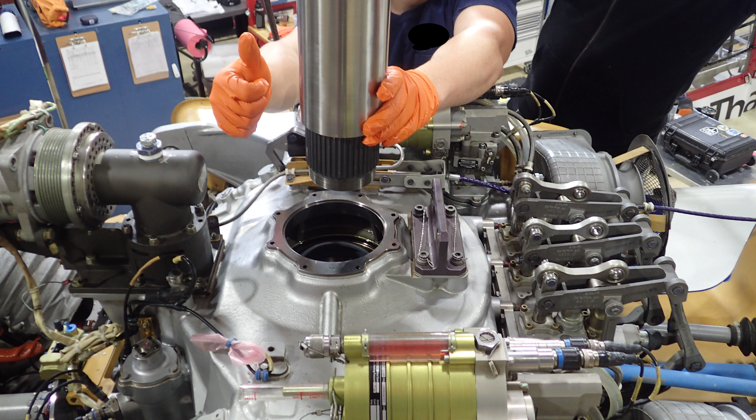This video we're going to go over installing the main rotor hub shaft, or the mast, into the transmission of an EC135 helicopter. The other two videos covered removing the mast and inspecting the spacer tube. This is the third and final video in this series.

I'm sorry, this is going to be a long video with a ton of detail. I'm going to talk a whole bunch, and it's going to be very boring, and you're going to be drinking from the fire hose. I'm sorry, but there's a lot of good information here. You're a lucky little boy, because you know why? You get to drink from the fire hose!

Okay, you ready? Yeah! Open wide! Aircraft Maintenance Manual, AMM.

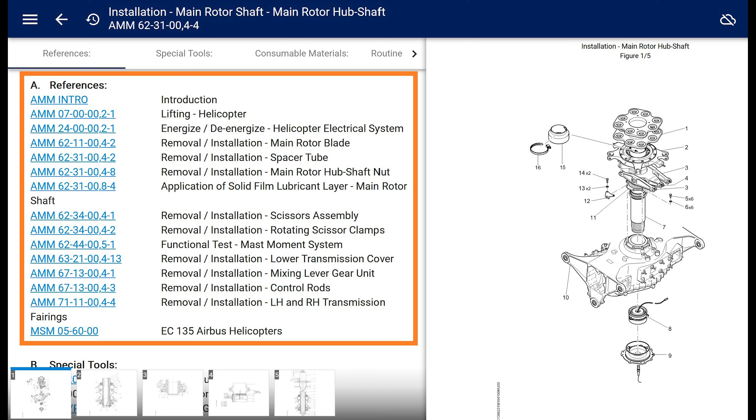623100 4-4. There are a lot of references. See all these references here? And when you go to those references, the other chapters in the maintenance manual will send you somewhere else as well. So if you go to this section, the one for installing the main rotor hub shaft, the mast, it doesn't tell you to add oil. That's in a different section, installing the lower cover to the transmission. Anyway, we're going to go over all these things.

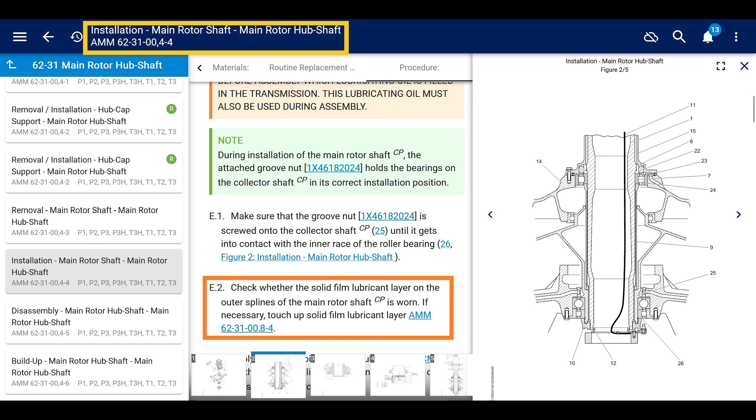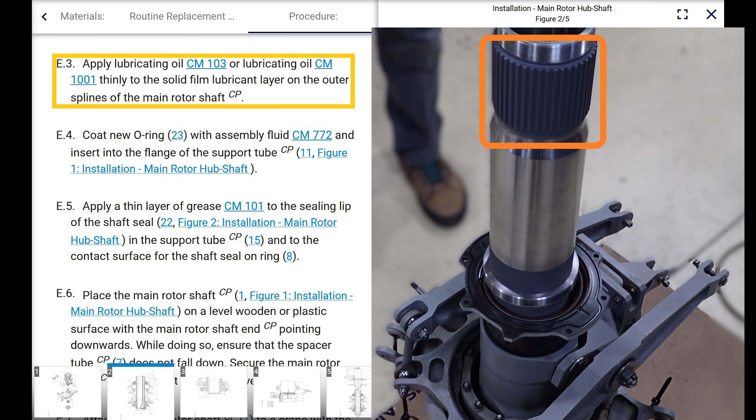Next, check whether the solid film lubricant layer on the outer splines of the mast is worn. If necessary, touch up the solid film layer. Next, figure out what kind of oil you have in your transmission and put some oil on the splines of the mast. Next, coat a new O-ring with assembly fluid, CM772, which is UltraChem assembly fluid number one.

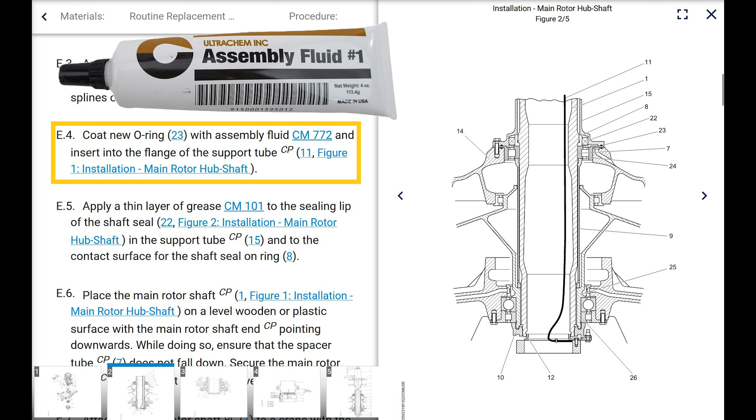You have to have this. If you don't, that O-ring is not going to stay in there. This stuff is super sticky, and it keeps the O-ring in that groove. Since that groove isn't a big circle, it's a weird shape, it keeps it in there way better than anything else I've tried to use.

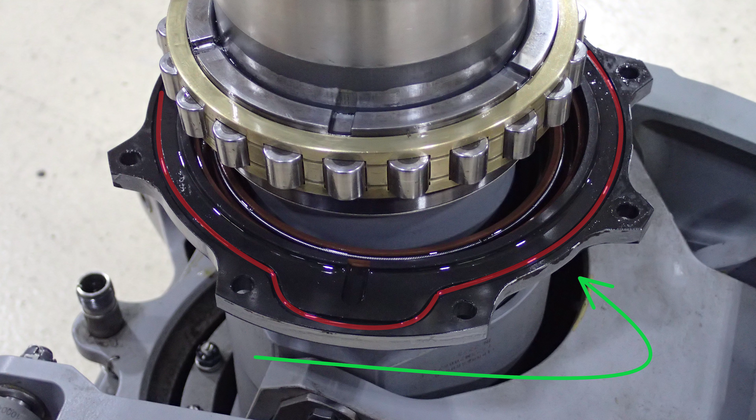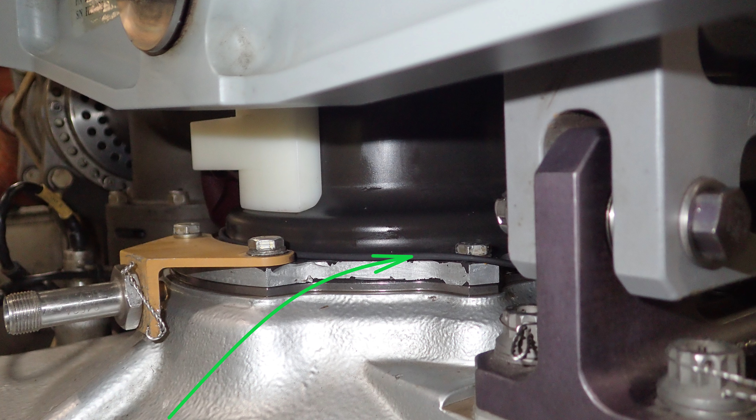While you're doing this, grab another O-ring, the same O-ring, and put it around the mast and put it on the other side of the support tube, the swash plate support tube. So when you're all done and you put this thing all together, if that O-ring leaks or got pinched somehow, you'll have an extra O-ring. All you have to do is lift up the support tube, put the new O-ring in there, and remove the old one.

Apply a thin layer of grease, CM101, to the sealing lip of the shaft seal in the support tube and to the contact surface for the shaft seal on the ring. So put grease on the lip of the seal and on this ring.

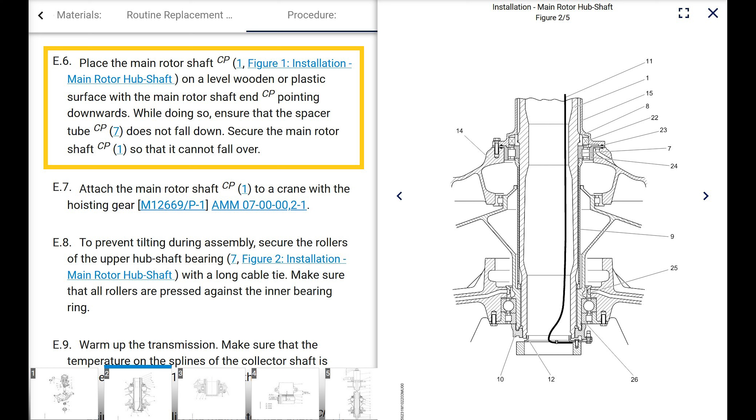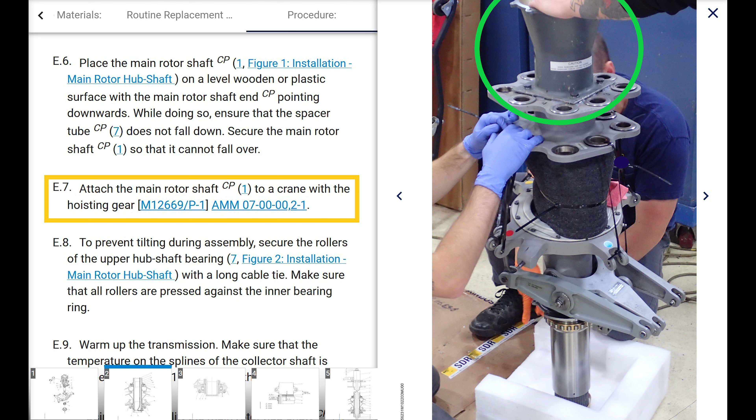All right, get a couple people, put some gloves on, pick up the mast and stand it right side up, making sure it doesn't fall down and that it's sitting on something nice and soft. Then put the flower pot back on and hook up the lifting eye and the crane or hoist, however you're going to lift this thing up.

Put a big zip tie around the rollers of the mast bearing and make sure you push all those rollers in and cover it with oil. It doesn't tell you to do that, but there's nothing wrong with putting oil on it. Make sure those rollers are pushed in, none of them stuck out at all.

If they're stuck out at all, when you drop this into the top of the transmission, it will catch on the outer race of the bearing and wreck the brass. It will wreck the brass carrier there.

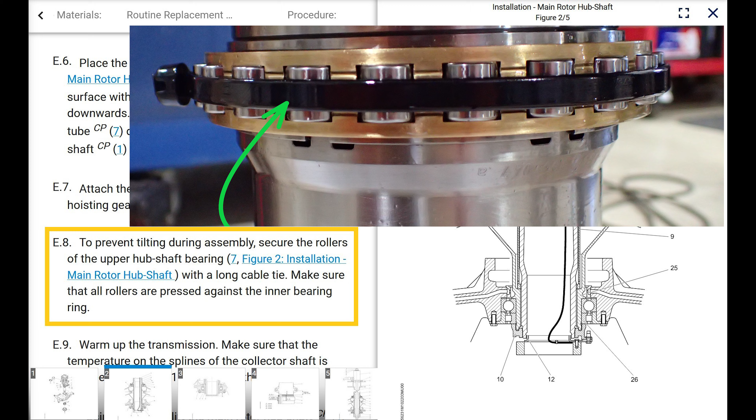I've heard of a guy having one of those rollers explode on him. So be careful, wear safety glasses when you're doing this.

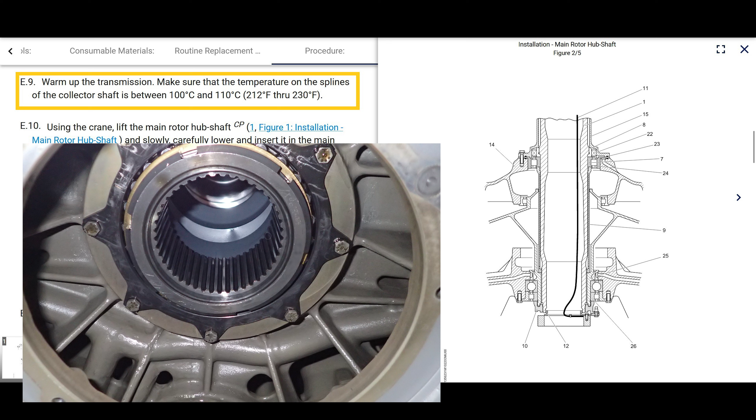Next, you want to warm up the transmission pretty hot. Make sure the temperature of the splines of the collector shaft is between 100 and 110 degrees Celsius. That's pretty hot, so set up a heat gun blowing heat into the bottom of the transmission, and put a piece of sheet metal over the top so the heat doesn't escape. Leave it there until the outside of the transmission is pretty hot. If it's hot enough, the mast just drops in.

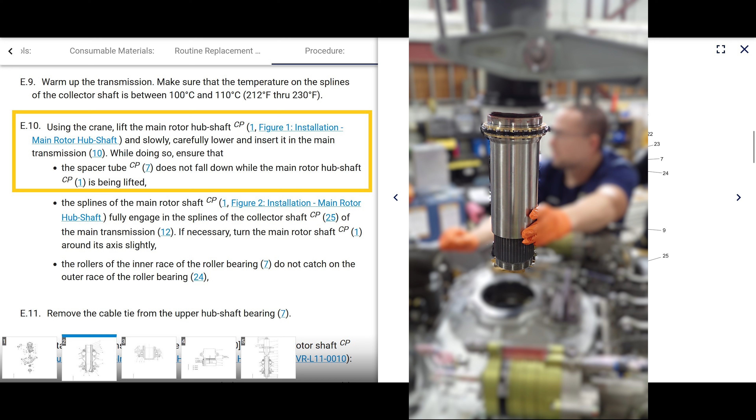Next, using a crane, lift the mast and slowly lower it into the top of the transmission. While doing so, ensure that the spacer tube does not fall down, and that the splines of the main rotor shaft fully engage the splines of the collector shaft in the transmission.

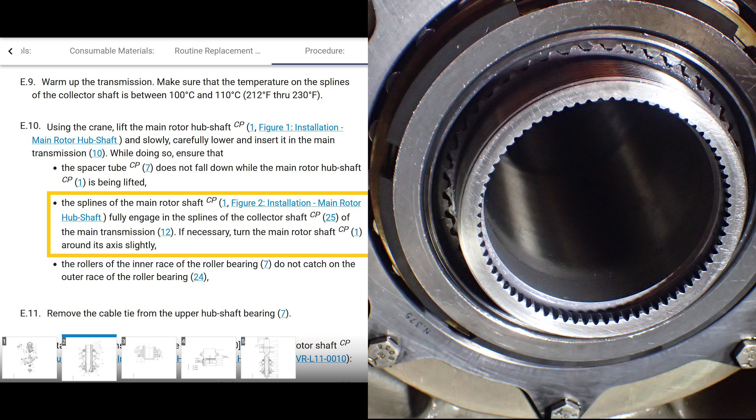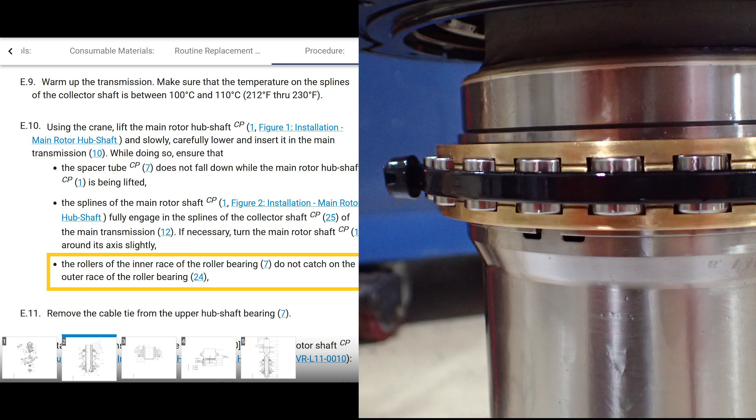If you need to, you can rotate the mast—grab the upper part of the mast flange and rotate it a little until the splines line up, and then it just drops in. Just make sure the rollers on that bearing don't catch on the outer race.

When it's sliding down into the transmission, the tolerance is really close, so the zip tie will get pushed up and out—it won't get jammed in there. Just make sure you cut that zip tie and pull it out when you're done. That's in the manual too.

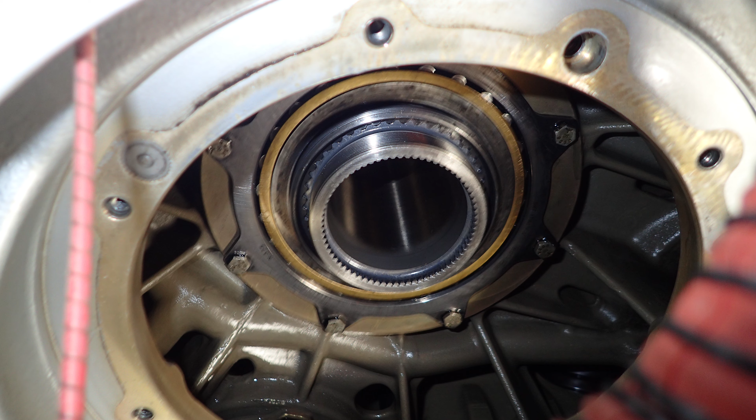We're going to deviate from the manual just a little bit, but we'll go through it. At this point, if you check dimension X and it's what it was when you removed it, or within the tolerances stated, we'll go through that later. I don't see why you'd have to do this next step.

But this next step is Airbus wants you to squeeze this whole thing together using a thing called the pre-tensioning device, which squeezes the mast into the collector shaft of the transmission with a lot of force. The pre-tensioning device parts are marked in orange, and the parts marked in green are in your kit, except maybe one of those.

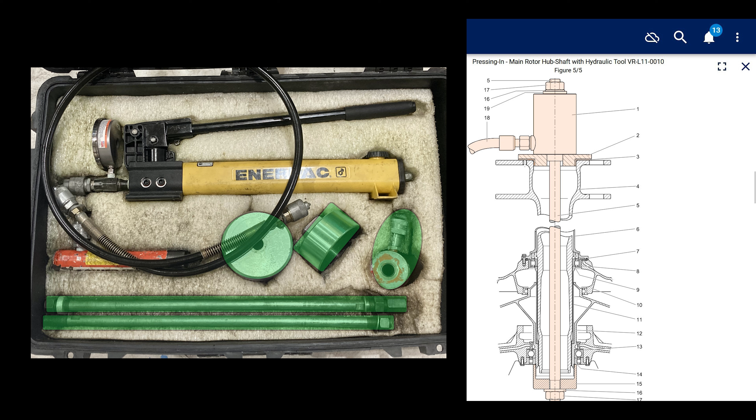Anyway, you have to put it all together from the top down. Before you hook up the stuff on the bottom, remove the groove nut, the one you just put on. The reason it was there, according to Airbus, is so the inner race of your collector shaft bearing doesn't fall out while you're putting the mast in. I've never seen that happen, but like I said previously, don't be the guy who has to call your boss and say you broke the transmission because you didn't use the correct tool.

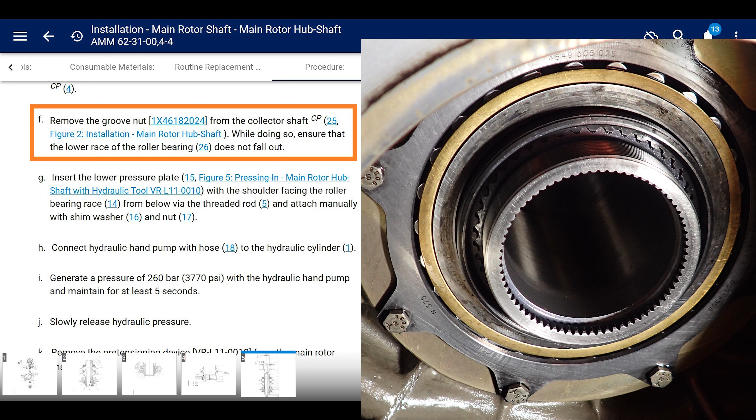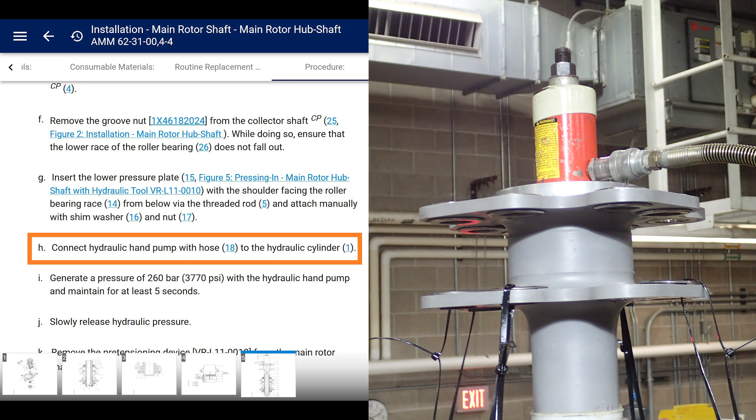At this point, remove the groove nut. You need to look at the drawing and make sure everything's hooked up correctly—it's not super confusing, just make sure you have all the right parts pushing on the right parts inside the transmission. Connect the hydraulic hand pump with the hose to the hydraulic cylinder. Generate a pressure of 3,770 psi with the hydraulic hand pump and maintain it for at least 5 seconds.

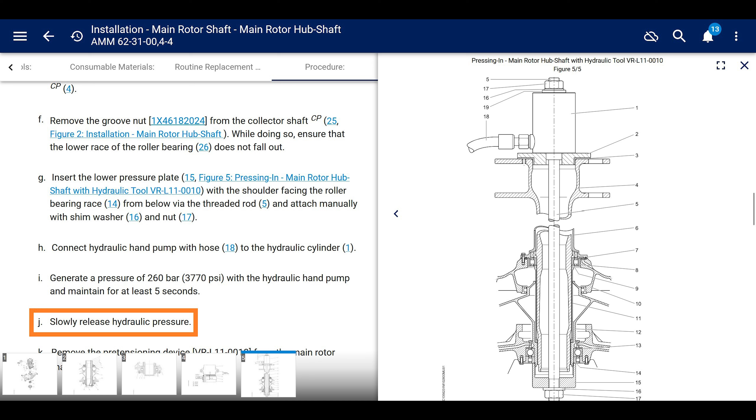It's a decent amount of pressure. Slowly release the hydraulic pressure, then remove the pre-tensioning bolt from the main rotor hub shaft pre-tensioning device.

Now they want you to check dimension X again, like we talked about before—that's from the lower edge of the mast, or the main rotor hub shaft, to the lower edge of the collector shaft. When checking dimension X, if you're using the same mast and the same spacer tube, and reinstalling the same ones, compare the dimension to what you had before you removed it—it should be equal or greater. If not, something's not installed correctly, like maybe that ring didn't get pushed all the way down during reinstallation of the mast.

If not the same mast and the same spacer tube are to be reinstalled, the clearance of dimension X should be between 13.9 millimeters and 14.9 millimeters. If it's not in this range, then something's wrong.

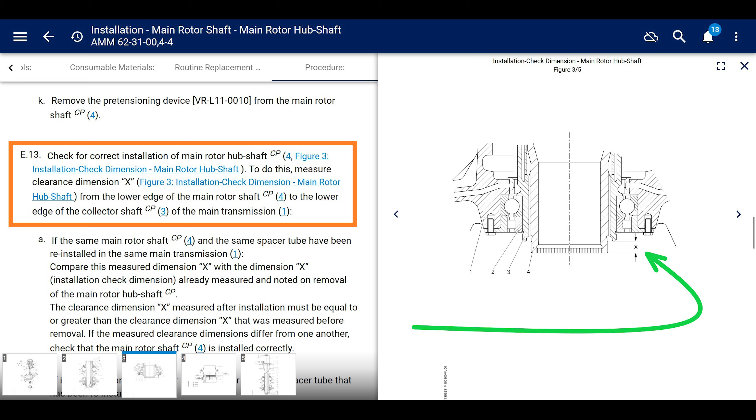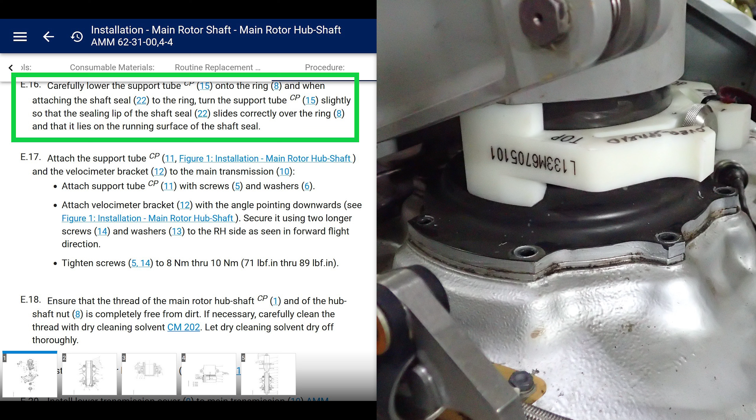Also check to see if the spiral spring is in the groove of the seal. If that pops out, your seal is not going to seal. Look with a mirror, double check that spring is where it's supposed to be inside of that seal. Carefully lower the support tube onto the ring which is on the mast, so the shaft seal has to go around that ring. You could twist it around a little bit so that the lip of the seal goes around that ring. Remember, that should have been coated with grease, so it should slide down pretty easily.

Next, it says attach the support tube and the velocimeter bracket to the transmission, and just make sure that the velocimeter bracket, the part with the angle, points down. If it points up, it could interfere with your flight controls, so it's kind of a big deal.

Moving along, ensure that the threads on the very bottom of the mast are clean and free of dirt. It specifically says that. Hopefully you would have cleaned it before you dropped it in there, and put oil on it. It doesn't ever tell you to put oil on it, but you should, because you got to put oil on the mast nut. Anyway, make sure it's clean. If you need to, clean it with CM202 dry cleaning solvent and let it dry. Next thing we're going to do is install the mast nut, the main rotor hub shaft nut.

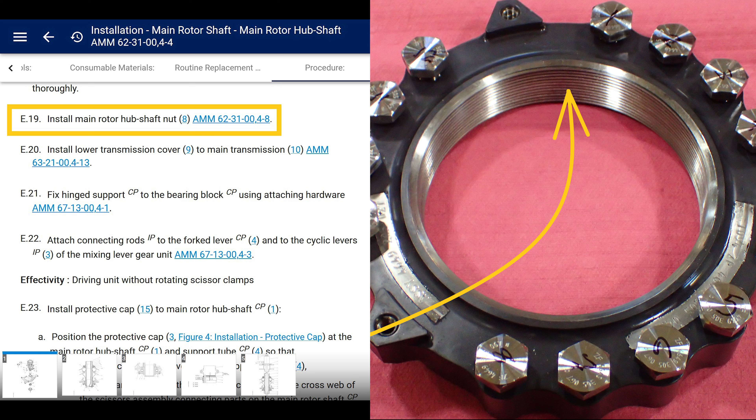That's a different chapter, and we're going to go into that with a lot of detail. This is AMM 62-31-00,4-8, mast nut install.

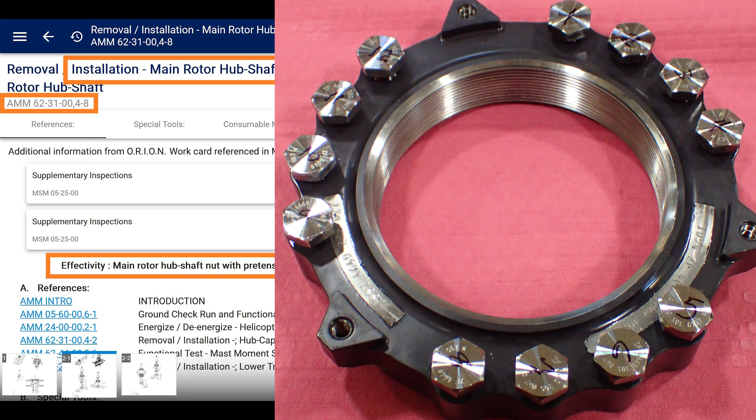There's two different types of mast nuts. The type we have here is the mast nut with the pre-tensioning bolts, that's the newest style mast nut. There's also the lower seal, open retaining ring, closed retaining ring, with the seal, without the seal. There's like 6 different versions. Anyway, we're going to go step by step with what we have.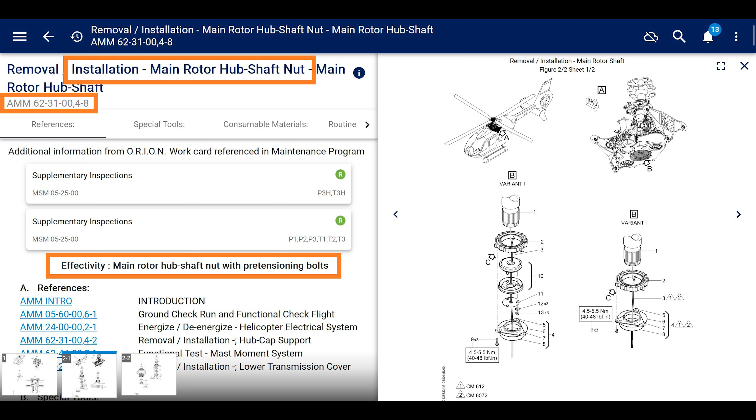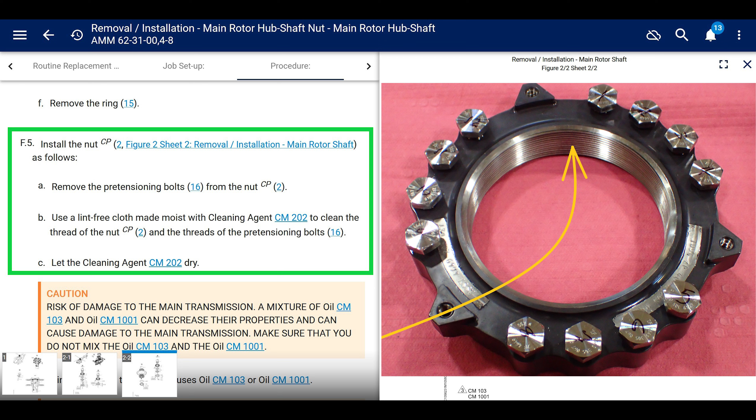This is the new style mast nut with the pre-tensioning bolts. It says remove the pre-tensioning bolts from the nut. Clean the threads of the nut and the threads of the pre-tensioning bolts with CM202 and let it dry. Then figure out what kind of oil you have in your transmission, hopefully you know because you can't mix them. They want you to apply transmission oil onto the threads of the nut and the threads of the pre-tensioning bolts.

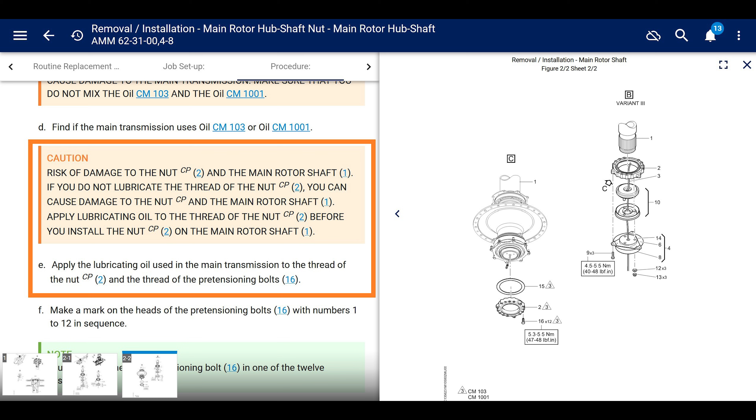Then install the pre-tensioning bolts, but just thread them down, don't thread them through the nut. Thread them like 90% of the way through, don't let them protrude out the other side. Then clean the top, the heads of those bolts, and mark them 1 through 12 in a circle clockwise.

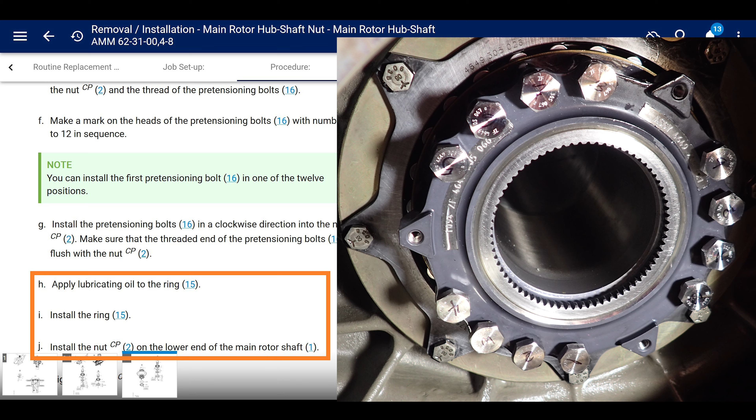Then they want you to apply oil, transmission oil, to the ring. They want you to install the ring and install the nut onto the bottom of the mast. Then tighten the nut. So that big thing with the pre-tensioning bolts, just thread that on, don't get crazy, just thread it until it makes contact and it's somewhat tight. But when you go torque these, they're going to allow you to loosen it up a little bit if you need to line up everything, the retaining ring.

If we scroll down, effectivity, closed retaining ring, post-service bulletin EC135 63016 on this part of the maintenance manual. This is variant 3, closed retaining ring, and the service bulletin is the seal that goes onto the retaining ring, so the retaining ring is an assembly. We went over this in the previous video. It's got the retaining ring, the bolt locking washer, and the rotor ring for the mast moment indication, and it also has this lower seal bolted to it.

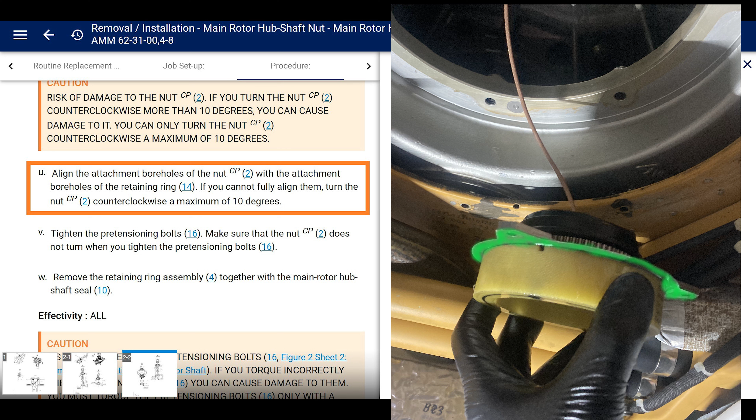It says install the retaining ring assembly. Okay, look, we're going to install this just to make sure it lines up. Then we're going to take it off, and then we're going to torque these bolts. So no worries. You've got the mast nut threaded on. Put the retaining ring up there.

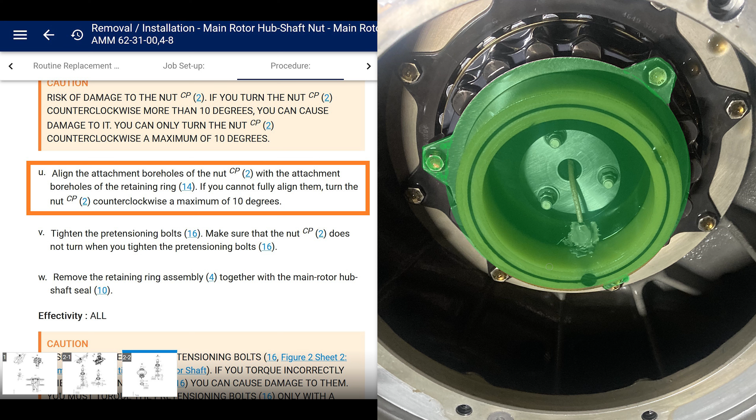You're going to need to drop a string down the mast and pull up the cable for the mast moment wire, then put the retaining ring assembly up there and try to line it up with the splines of the mast and pick up the 3 holes that line up with the mast that this bolts to. If it doesn't fit, you could pop it out and turn it 120 degrees. You have 3 tries to line it up — figure out which one is closest.

It says there's a huge caution, okay? You're allowed to back up the mast nut 10 degrees. If you go more than 10 degrees, you're going to damage stuff. And considering this is probably the most critical part on the helicopter, follow that rule. I've seen it line up most of the time without loosening it up, which is pretty cool.

Anyway, put the retaining ring assembly up in there. Align the attachment bore holes of the nut with the attachment bore holes of the retaining ring. If you cannot fully align them, turn the nut counterclockwise — that means loosening the nut a maximum of 10 degrees. I would put the 3 bolts in that attach it, just thread them in by hand, just to make sure they're lined up, because it will look lined up but it won't be. Later on, you'll be pissed off because you have to do all this again.

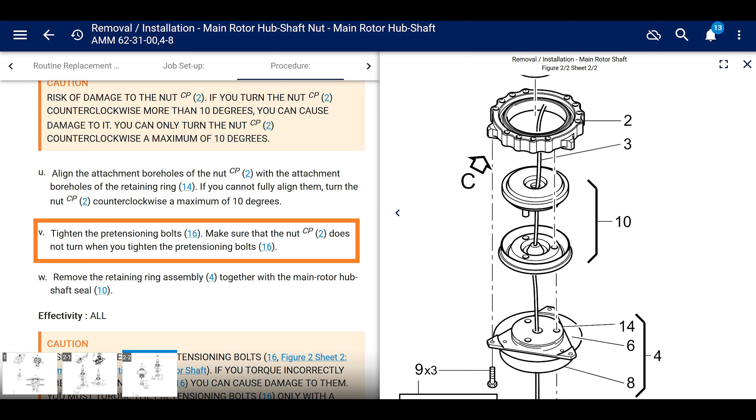Anyway, while that's in there, reach over the retaining ring and use your fingers to tighten the pre-tensioning bolts, those 12 bolts, just so the nut doesn't move when you take the retaining ring assembly back off, so that you could torque these bolts — if that makes sense. I know this is a lot of words and I'm blah, blah, blahing you, but hopefully it's a little bit clearer. The pre-tensioning bolts are snugged up with your fingers.

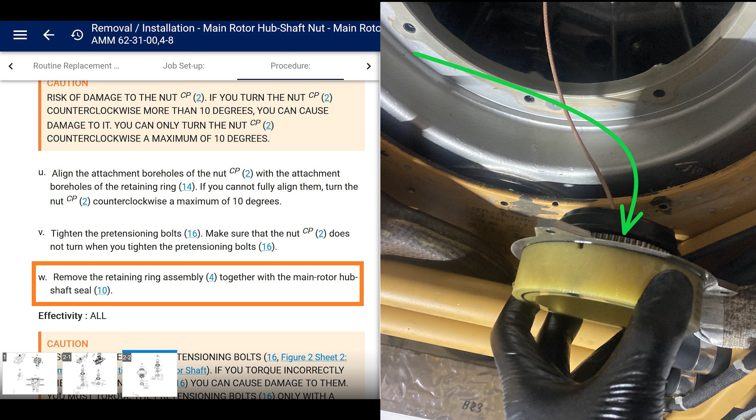Now you could remove the retaining ring assembly, remove it with the mast seal at the same time, because it's a big assembly. This is effectivity of all, and this is how you torque the pre-tensioning bolts of the mast nut. Torquing the pre-tensioning bolts has a specific sequence, and it's like 2 pages in the maintenance manual. You have to follow it correctly.

If you just look at the figure and you see the torque is 47 to 48 inch-pounds, and you're like, oh, I'm just going to torque this to 48 inch-pounds, you're going to screw stuff up. That would be very bad. That's super incorrect. And like I said, this is probably the most critical part on the helicopter, so it has to be done correctly.

We're going to go over that now. It's not a big deal, but we're just going to make sure we state the proper process on how to torque this mast nut. It's June 2024 — it could be revised tomorrow. Read the manual, don't rely on the video. This is just a refresher for reference.

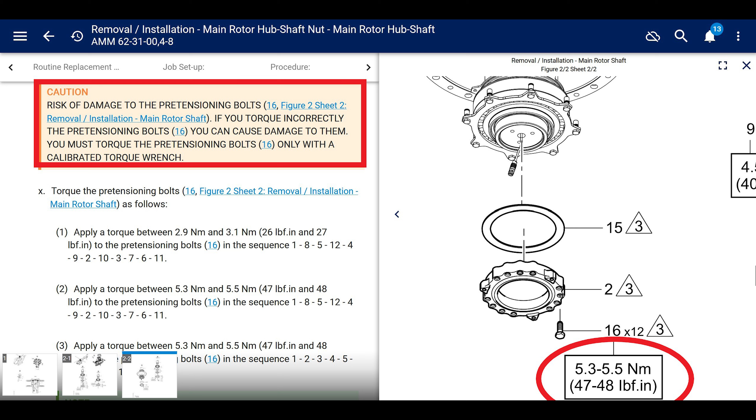Next, it says torque tighten the pre-tensioning bolts in the sequence 1, 8, 5, 12, 4, 9, 2, 10, 3, 7, 6, 11. After that, once you've torqued it to 27, you change your torque wrench to 48 inch-pounds, between 47 and 48 inch-pounds, and you torque it in the same sequence: 1, 8, 5, 12, 4, 9, 2, 10, 3, 7, 6, 11.

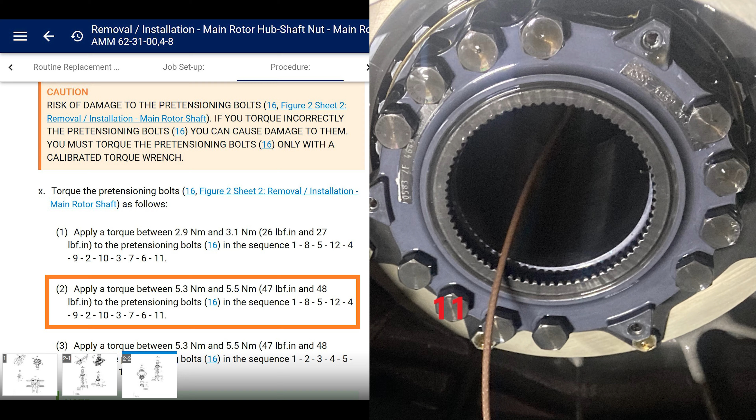Third step, same torque, 48 inch-pounds, and you torque it 1 through 12: 1, 2, 3, 4, 5, 6, 7, 8, 9, 10, 11, 12. Oh, you can count — good for you.

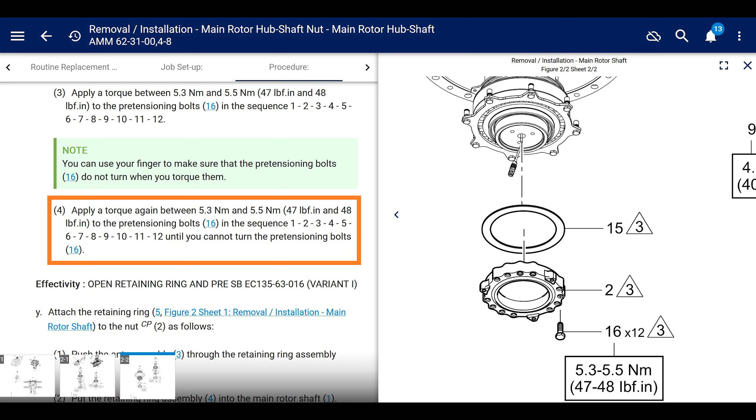Next, step 4 — well, number 4 is repeating forever until it doesn't spin, all right? Apply the torque again at 48 inch-pounds in the sequence 1 through 12 until you cannot turn the bolts, okay? Because you'll have one that'll turn, one that'll just move a little tiny bit each time you go around, so you end up going around like 4, 5, 6 times originally.

On the retorque, I think I went around three or four times just to make sure it was torqued. But there's a note here—it says you can use your finger to make sure the bolts do not turn when you torque them. Okay, thanks for that. And here's the effectivity closed retaining ring.

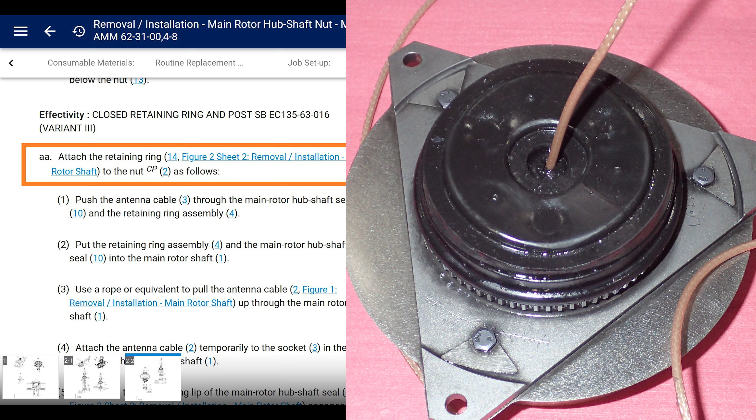What do we do next? Put the retaining ring assembly and the main rotor hub shaft seal, since they're together, into the mast, the main rotor hub shaft. So you push it up there, and you need to make sure it goes the right way. You could rotate it 120 degrees—there's three different positions it'll fit in, but one of them will line up your bolt holes. Once you get it lined up right, just pop it in there. The seal will fit in nice and easy.

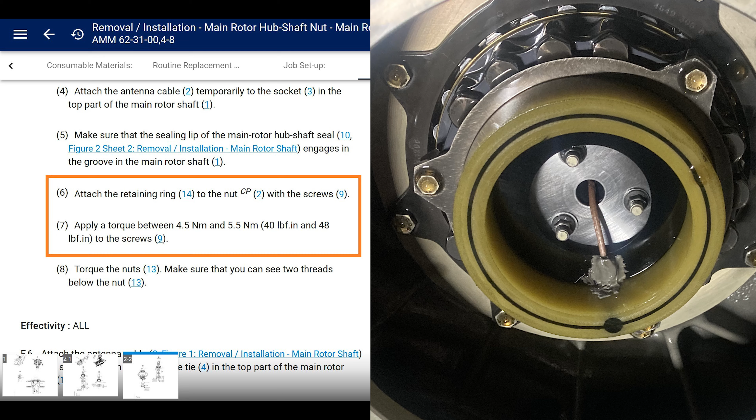There's a groove—it says make sure the sealing lip of the seal engages the groove in the mast. Not complicated. Then it says attach the retaining ring to the nut with the screws and torque them to 40 to 48 inch-pounds. Next, tighten the three nuts for the main rotor hub shaft seal, the seal nuts, until you can see two threads.

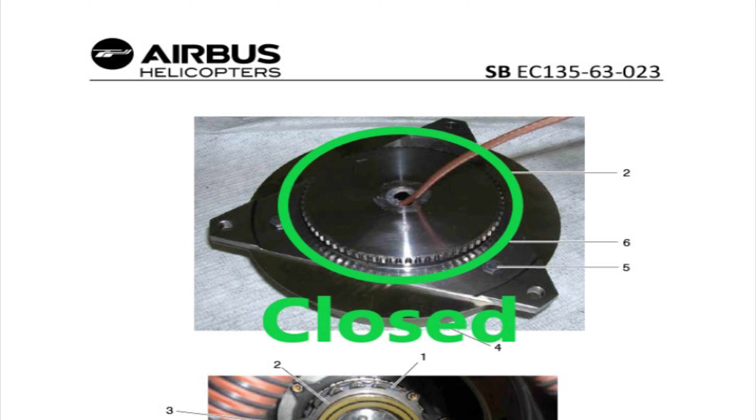This is for the closed retaining ring, and you have to make sure you have the stack up correct. I've done this job and I've seen the stack up done wrong. Anyway, you have to make sure the stack up is correct. If you have the closed retaining ring, you don't need this one spacer sheet.

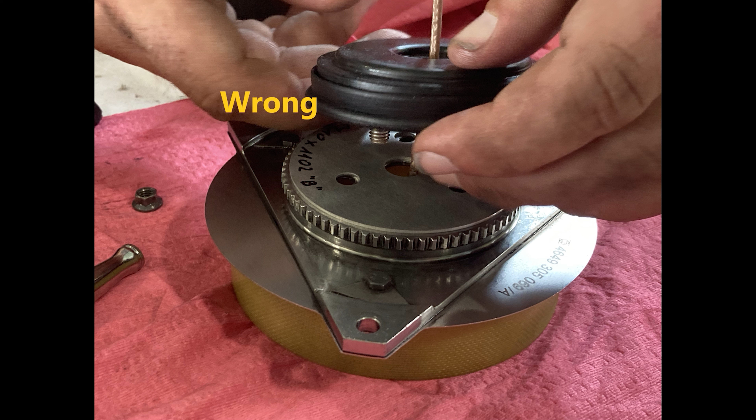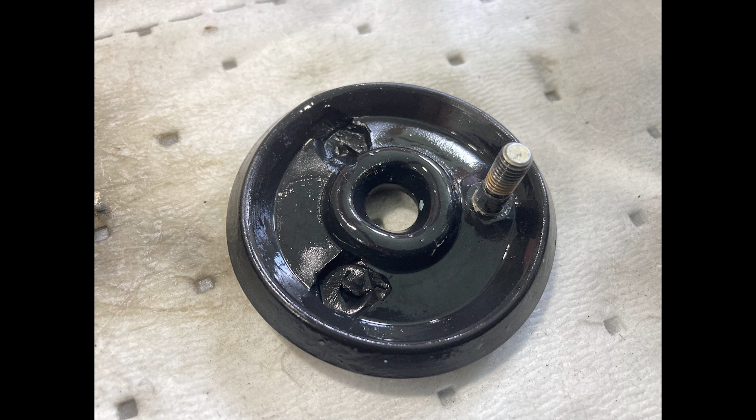If you have the closed retaining ring and the spacer sheet, and you have two threads or three threads, it's too much, because you'll have too much torque on the bolts inside the seal, and you're going to wreck them. Then you're going to be the next guy who tries to loosen it up and can't, and you end up breaking the bolt off of the rubber.

All right, this is exciting. I like this ship, you know, it's exciting.

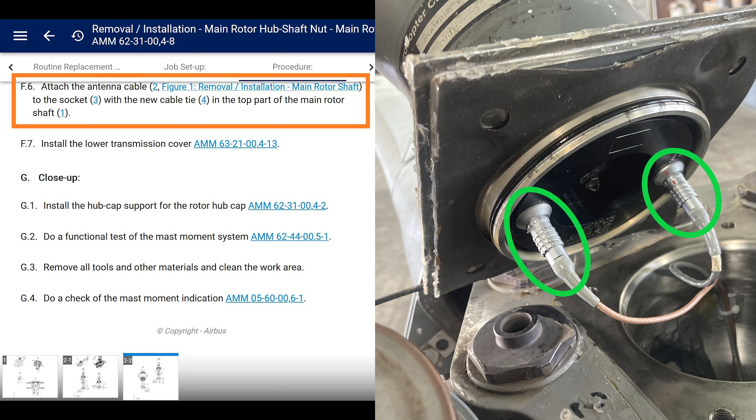Next, the mast moment wires at the top of the mast plug into the hubcap support. So you're going to have to uninstall that again, pop it out, make sure it has a new O-ring, and check the EMC gasket there. I'll put all the part numbers in the description for everything in this video. Anyway, plug in those cables, and there's a zip tie inside the mast that you zip tie one wire to, or both wires—I can't remember, it's hard to tell in this picture.

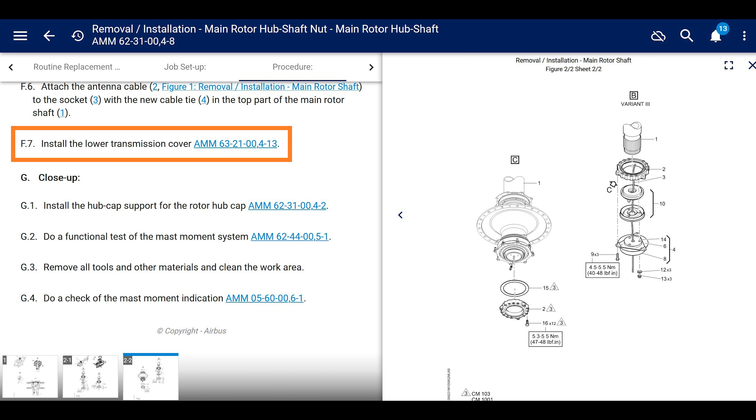Okay, we're still in the mast installation section. It says install the lower transmission cover. This is maintenance manual AMM 63-21-00-04-13. We're going to go there next.

All right, installing the lower cover for the transmission. Follow this section—it gives you the torques, it tells you where to put Mastinox. You need a giant O-ring. Don't start this job without it. Maybe have two just in case.

But in this section, it gives you a reference for installing the Y strut, and then it tells you to put oil into the transmission, service the transmission with oil. This is the only section where it tells you to do that—don't forget. We're going to talk about that again at the end as a reminder. I mean, don't be that guy. I've never done that, knock on wood.

Yeah, it's all done, except we don't have oil in the transmission—whoops. Okay, so at this point, put the cover on, plug in the mast moment wire, bolt up the cover, and add some oil to the transmission. I'd service it now, check for leaks, and then top it off. They want you to do this later on, but I recommend doing it now before everything's hooked up.

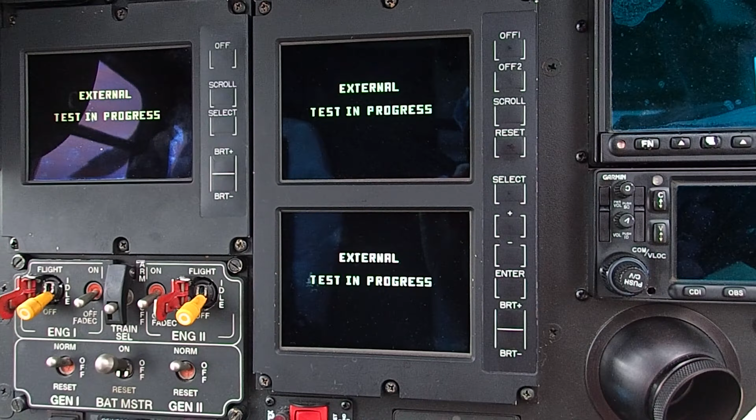You may even do it before you add oil to the transmission, but it says do a functional test of the mast moment system. There are two different sections: one is do a check of the mast moment indication, and the first one is do a functional test of the mast moment system. This has you power up the helicopter, make sure the mast moment indication is there and it's not yellow—it's white with an MM, and there's a white arrow that's not indicating any mast moment deflection. Also, if you go to this section, they want you to do a couple other things.

They want you to drop the Pelican rack in the back.

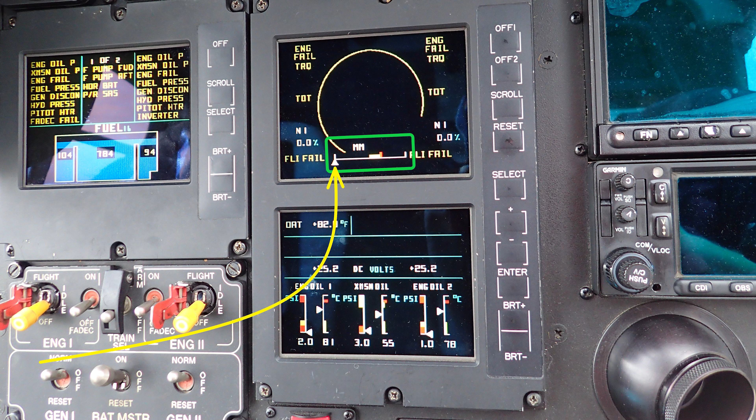We have Euro 5, which is what it's called. The maintenance manual only talks about Euro 2, 3, and 4. I don't know what's up with that, but anyway, it's the same. I think Euro 4 and 5 are the same.

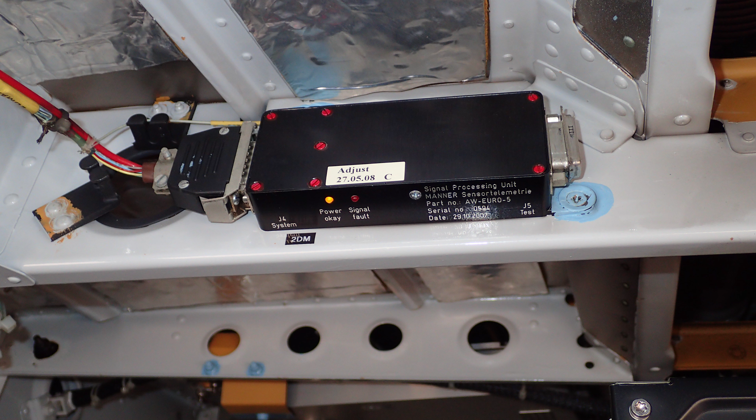If you drop the Pelican rack and look in the back, there's this box, and it's supposed to have a yellow light that says power okay. If it's red on the right side where it says signal fault, that means you have a problem. But it probably wouldn't show you everything's okay on the front.

They also want you to take this cover off of the right side of the box. There's a test plug there, and they want you to check for voltage at a couple of the pins there. So have fun with that. That's a functional test of the mast moment system.

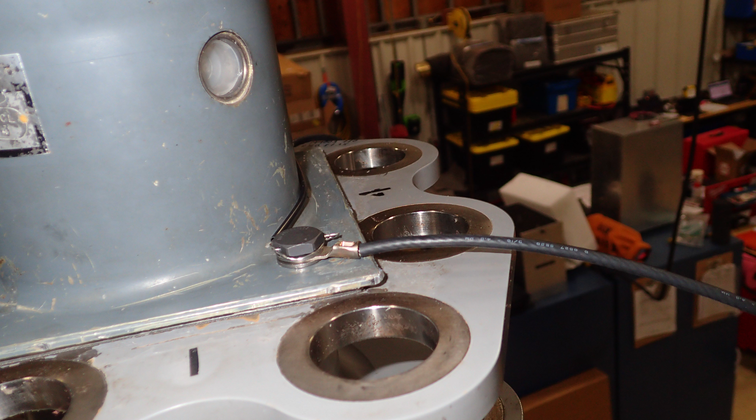Okay, now back in the maintenance manual for installing the mast. This also tells you to install the lower transmission cover, which is what we just did. And fully install the flower pot, the hubcap support on the top. Just go ahead and do that now, it's probably a great time.

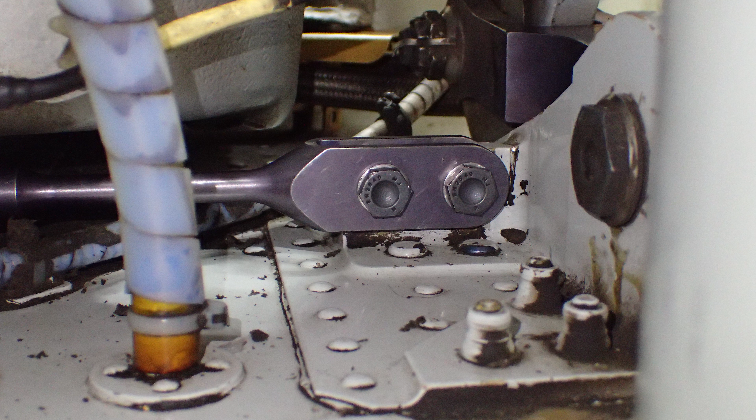And finish installing the lower cover, which is the Y strut. On that Y strut, on the outboard connection, it says to torque the nuts on those 2 bolts, and it just says ensure there's no axial play. So it doesn't give you an actual torque, it just tells you that there's no forward and aft movement. It's not loose, so don't gorilla torque it.

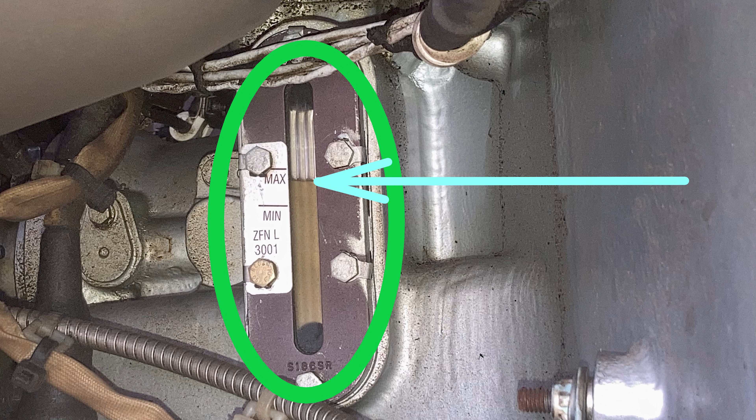Again, make sure you have oil in your transmission. Top it off. If you only put 2 quarts in previously, check for leaks, and go ahead and top it off. All right, now the lower cover's installed.

Have somebody eyeball in there. Before you put the cover on, have somebody eyeball or double check your mast nut installation and make sure there's nothing crazy going on up in there. You have guys here to help you, so don't just do it on your own.

Once the lower cover's on there and someone looks at it, go ahead and cover it up, put that lower fairing on there, or whatever they call it.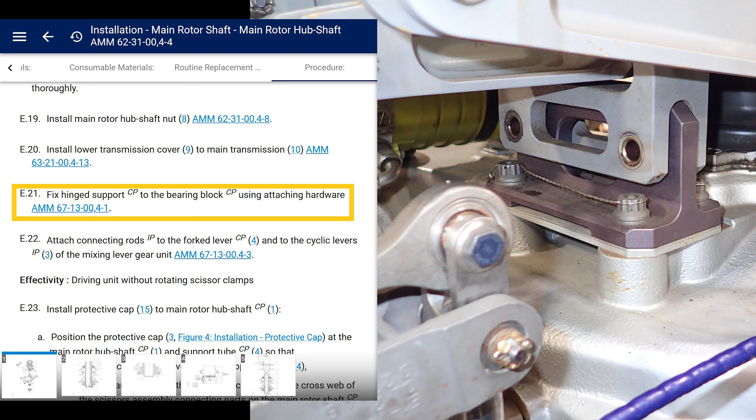All right, now we're really back in the manual for the installation of the mast. I'm on paragraph E21, and it says fix the hinged support to the bearing block using attaching hardware. It references a totally different chapter. That's these bolts right here.

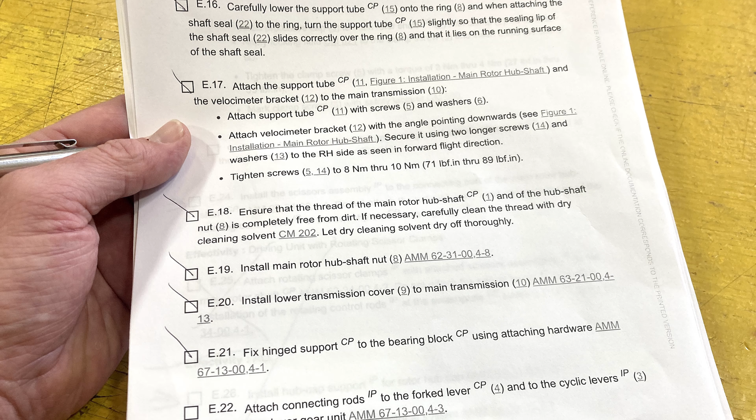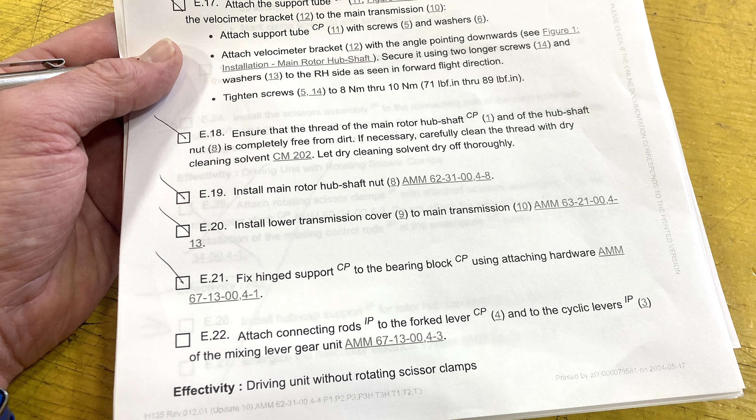Make sure when you're reading the manual and going through it, have it printed out and check the boxes as you go through, like we just did. It says fix the hinge support to the bearing block using attachment hardware with that reference. Have that reference printed out, go to it and go to the parts that are required, and check that box so you know it's done. Because there's like 50 things we're doing right now, and you're going to have 2 or 3 dudes working with you, and you want to make sure everything gets hooked up correctly. You don't want to leave anything unfinished.

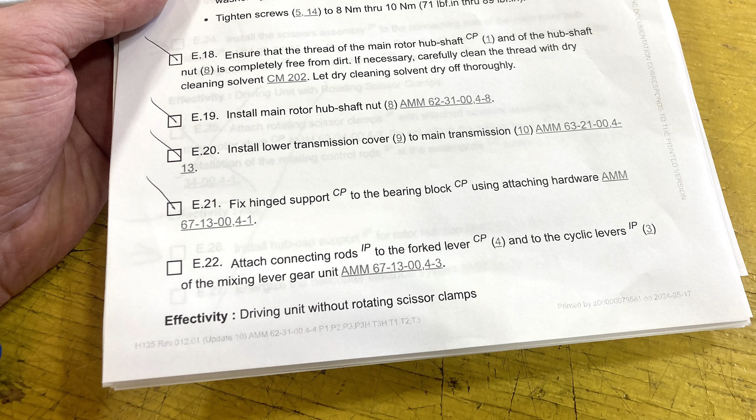Okay, next, attach the connecting rods to the fork lever and the cyclic lever of the mixing lever gear unit. That's another chapter, so go there and just do the parts they're talking about, which are the 3 connecting rods that go to the front of your mixing lever gear unit.

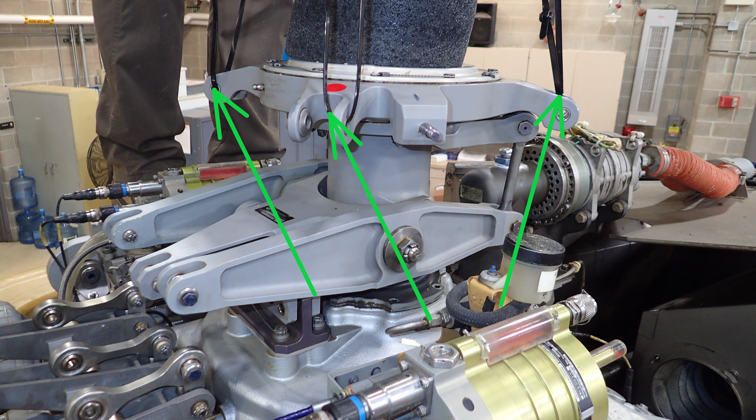Hook those up. So when you're connecting the 3 rods, before you cut the zip ties that are holding the top of your swash plate up, put this fixation clamp on there. This would be in the chapter for attaching the connecting rods to the fork lever, so don't forget to put that on there.

You might hold the fork lever down, which lifts up the swash plate, so that you could put this tool in there. Then you can cut the zip ties and lower it down onto here. Otherwise, your sliding sleeve of your swash plate is going to smash your swash plate support, and then you're going to be screwed because it'll have a big dent in it and you're going to need to replace that, and people are going to get mad. All right, anyway, moving on.

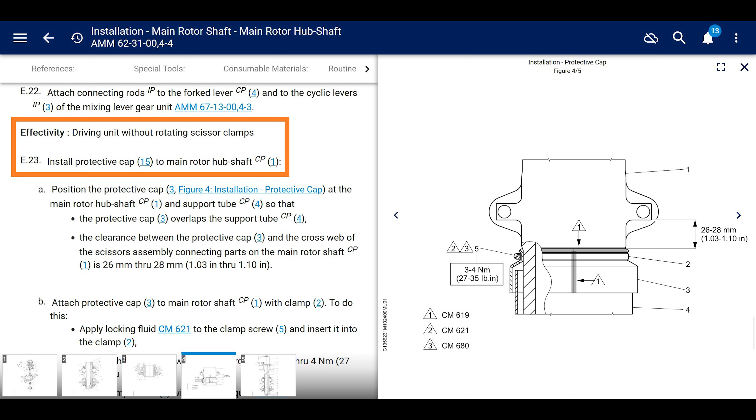It says install protective cap to the main rotor hub shaft. There's like 2 big paragraphs talking about how this goes on here.

So you clamp that plastic protective cap onto there in a specific location, and that rotates with the mast, but the part right underneath does not rotate. That's the top of the swash plate support. So there has to be a gap there. Otherwise it's going to touch and it's going to break stuff. It's just going to be contacting it, and that's not what you want. So make sure it's in the right spot.

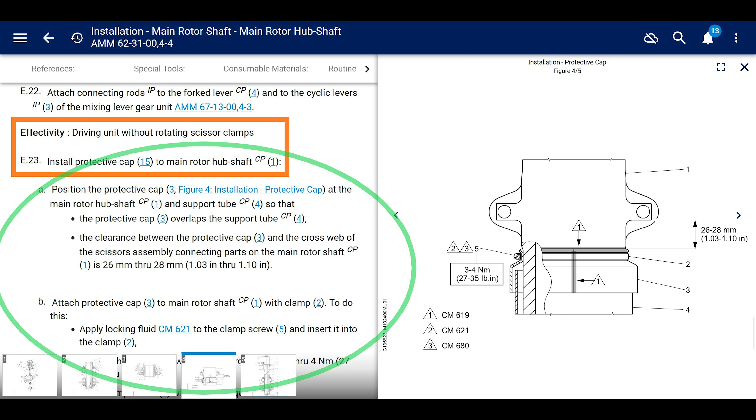They also want you to seal the top with whacker, and put safety lacquer onto the clamp screw. Not complicated, just make sure you follow the directions. That's in the manual for the installation of the mast.

All right, next, chapter E24. Install the scissor assembly to the connecting parts of the main rotor hub shaft. Those are both of your drive links. It says do not attach the helical lever, that's the bottom part, until after the installation of the pitch control rods for the main rotor blades. Otherwise, you can't put the bolt in for the lower PC connection.

So just install the top part of that drive link and then just temporarily install the bottom part. Just run those nuts down hand tight. But when you're done putting the main rotor blades on and the PC links on, make sure you go back and tighten up and cotter pin the lower connection of the drive links. That's something you could forget.

Don't forget. All right, now it says effectivity all. It says install hubcap support. We already did that. Oh man, we're almost done.

Again, it says to check the functioning of the mast moment indication. We already did that because we wanted to know if it was good before we finished everything.

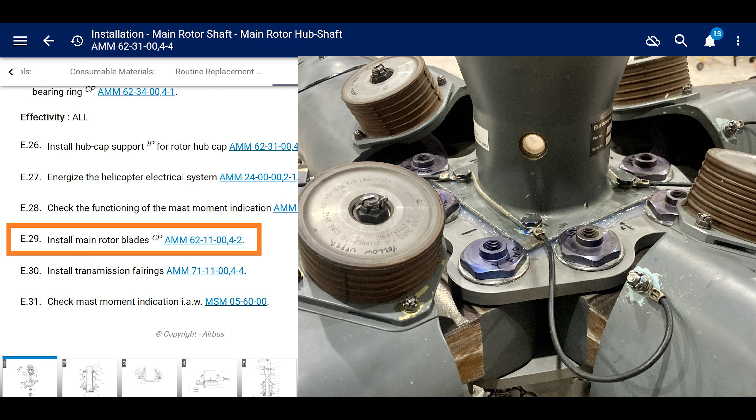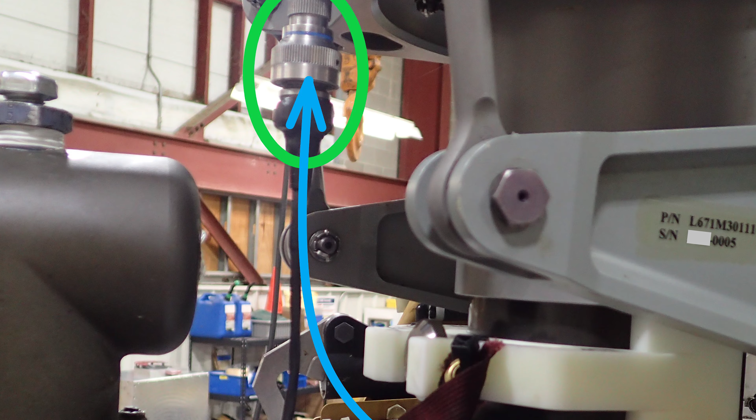Now it says install the main rotor blades and install the transmission fairings. So everything should be hooked up now. One last thing that I don't remember the maintenance manual talking about installing is the mag pickup on the back of the swash plate inner ring. Don't forget that. And the last thing on the list is to check the mast moment indication. And that's in the MSM.

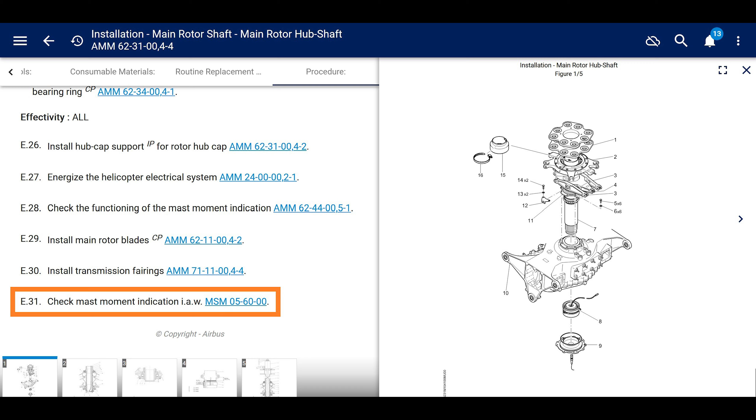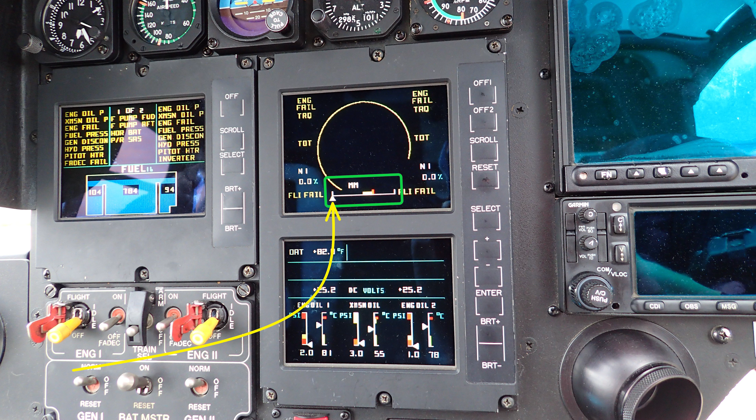056000. This is the one where you have to do the ground run and make sure the mast moment system sensitivity is correct. I'll make a video on that one later, but you run it up and bump the cyclic stick forward to certain spots, and then you have to check certain measurements to make sure when you move the cyclic a certain point, it moves the indication the correct amount. Not complicated, but when you read that procedure, it's not easy.

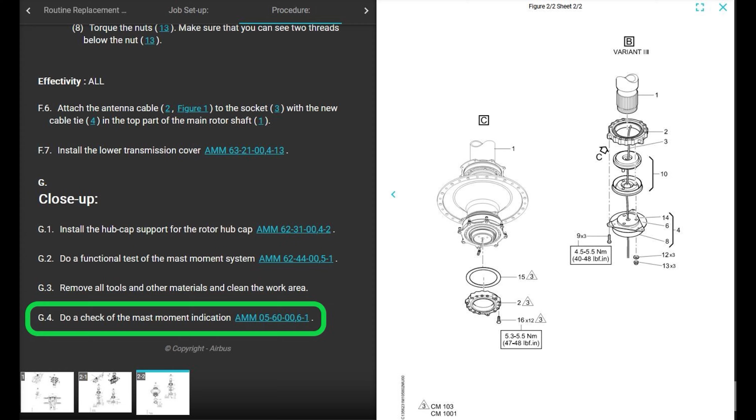And this reference right here, 05-60-00,6-1, that's the whole ground run and functional check flight. The only part you're doing here is just the mast moment on the ground, to be honest. And then you go do a functional check flight and make sure everything's good and there's no leaks.

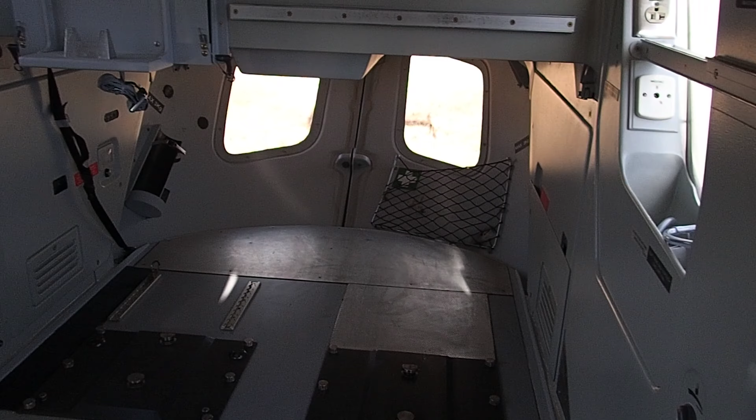Do your ground run, do your mast moment check. If there's no leaks, you could take that O-ring off, that extra one on your support tube. Take it off, throw it out, cut it off. That's it. I am excited. This job is done. This was a huge job, it took days to do. This video took like a year to make because I'm not very efficient.